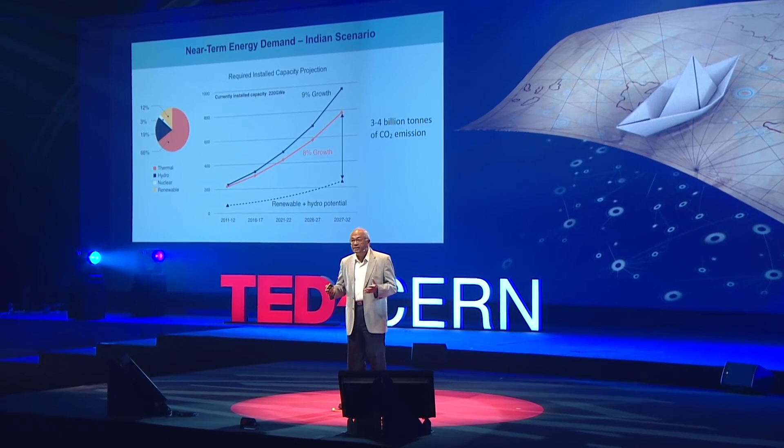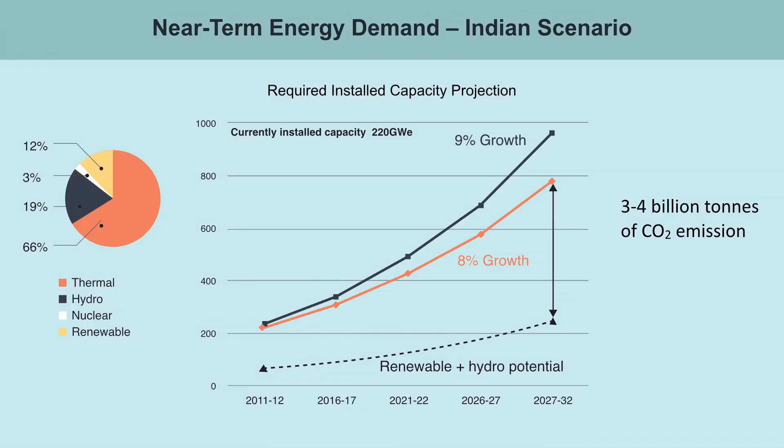So what is going to happen in the next 20 years? You know, in countries like India or China, there has been very large-scale economic growth. And all this economic growth can be sustained if you provide energy. So in the next 20 years, if this 8 to 9% economic growth, which has been continuously there in India for the last decade or more, continues, then you will see that we'll go from the present level of about 220 gigawatt installed capacity to something close to 800. So four-fold increase in energy.

And this would represent CO2 production of about 3 to 4 billion tons, over and above whatever is being done today. So that's the real challenge. So what is the solution? No doubt that the solution comes from the primary energy sources. It is solar, wind, and nuclear.

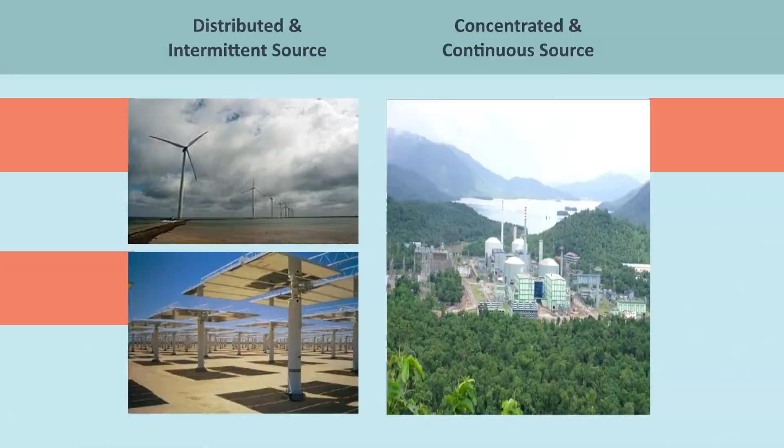But when we talk of these primary energy sources, they have to be classified into two classes. One is distributed and intermittent. The other, nuclear, which is very concentrated and continuous. It's very obvious to understand, because the sun doesn't shine all the day, neither does the wind blow. But nuclear has a very high capacity factor.

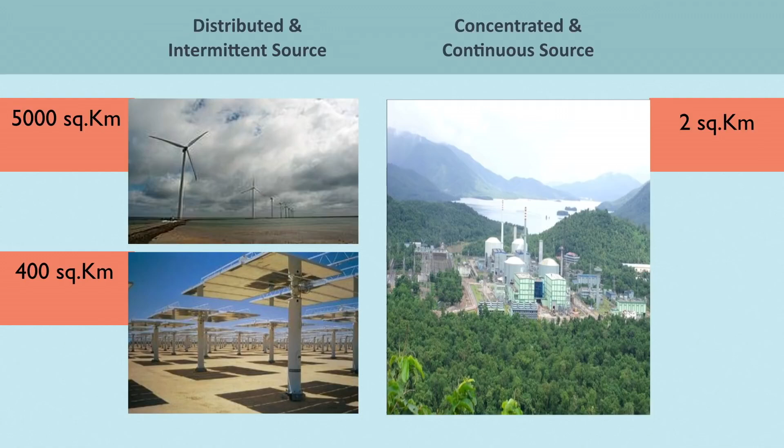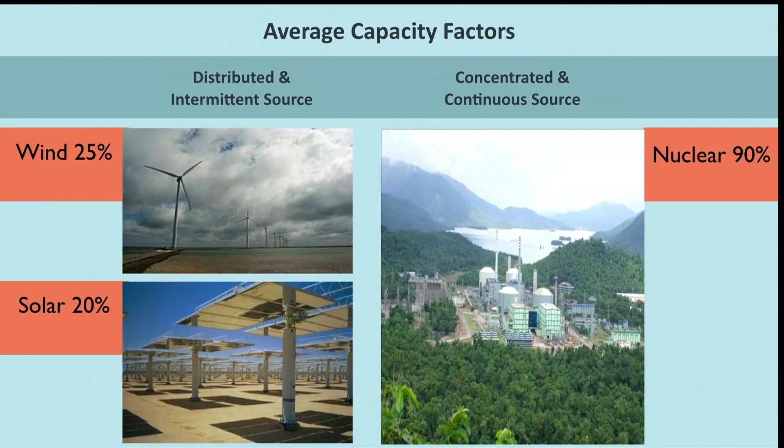And if you look at the kind of distribution, you require about 5,000 square kilometers of area to get a 10 gigawatt, 10,000 megawatt installation by wind. Solar about 400 square kilometers, whereas nuclear can do the job in about 2 square kilometers. Look at the average capacity factor. Capacity factor in wind and solar is about 20 to 25%, whereas in nuclear, it's a technology which has been proven, and it's over 90%.

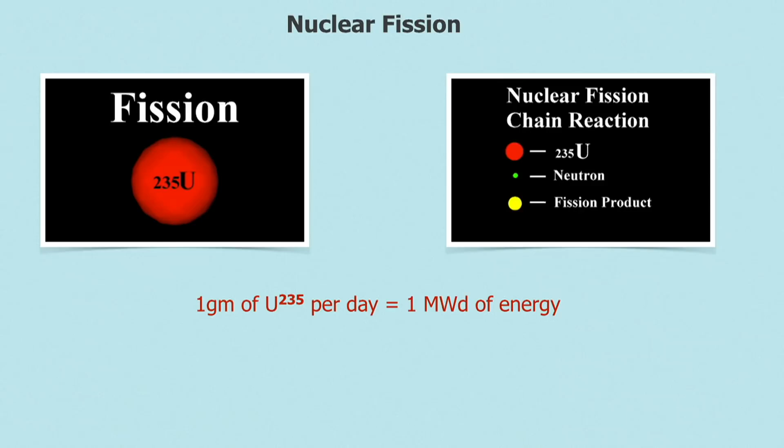The process of nuclear fission, I'm not telling anything new to this audience. You all know what nuclear fission is. You have a U-235 nucleus, a neutron comes, it becomes 236, an unstable nucleus, breaks up and provides energy and neutrons. Please also give emphasis to the neutrons that are created, because without them, it is not possible to establish a chain reaction. And one very important and simple fact to remember is that just 1 gram of uranium-235, if you burn it in a day, can support a 1 megawatt installation; 1 megawatt day of energy is produced.

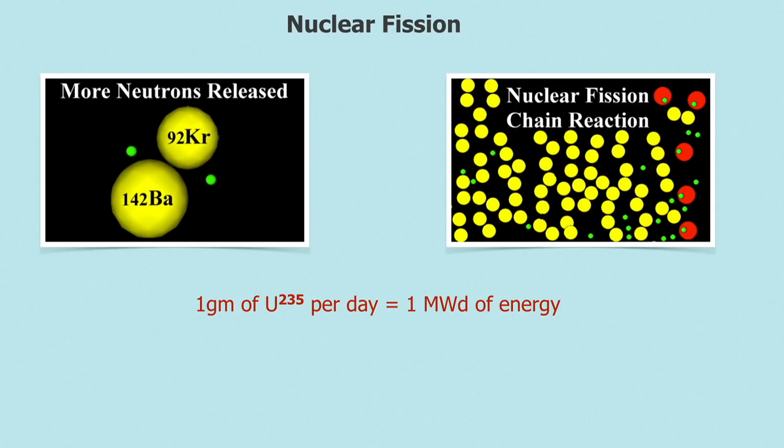And this is how the whole chain reaction proceeds. And everywhere you see that the most important point is the number of neutrons that are generated from every single fission process. The problem is that uranium-235, if you look at just that nuclide, which nature has given us, cannot really sustain nuclear energy for a long time. So the question remains: is it not possible to utilize the other part of natural uranium?

Natural uranium contains less than 1% of U-235, but the remaining 99% plus is uranium-238. And that gets converted into plutonium, which can be burnt again. Same way, the other element is thorium, which is 232. If it takes one neutron, then it goes over to uranium-233, yet another fissile isotope.

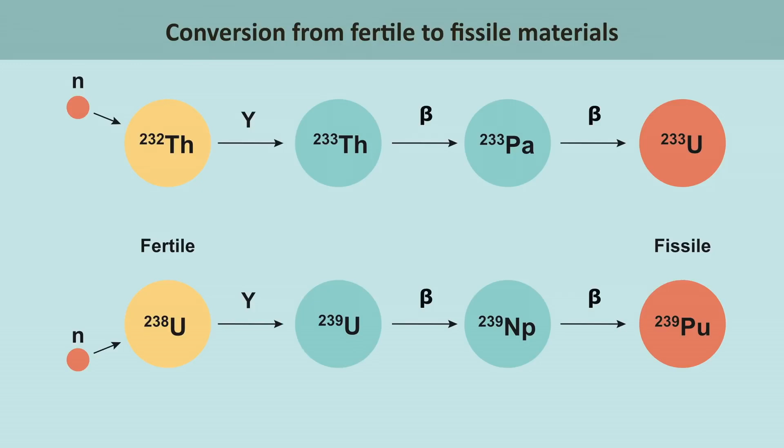So the moment we consider not only uranium-235, but also uranium-233 and plutonium-239 as our fissionable, burnable material, then you'll find that the energy stock that the world has is really sufficient for sustaining energy supply, not just a few centuries, but a few millennia.

So this was the hope of the first generation nuclear scientists who worked in several countries in the 50s. But now, because many other issues came up, the nuclear program has slowed down in several countries. But again, there's a revival of interest, particularly from the point of view of thorium utilization. Because thorium is very abundant, it's 4 times more abundant than uranium, and thorium is also very easily available, like the example that I'm showing here.

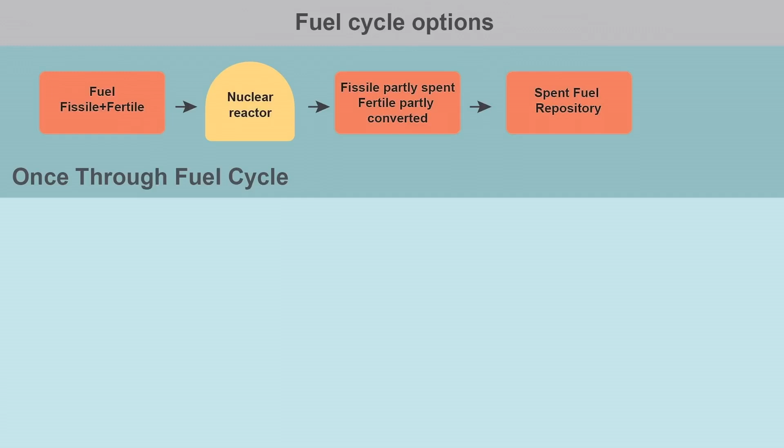It's available in the beach sand in Kerala, and there's a huge reserve of thorium in India, and in many other places like Scandinavian countries, and the stock of that is typically 4 times that of uranium in the world. But one has to accept the other important issue about the fuel cycle. If we use the spent fuel which comes out of the nuclear reactor as a waste, then we are not tapping its full energy potential. Only less than 1% of that energy potential has been used.

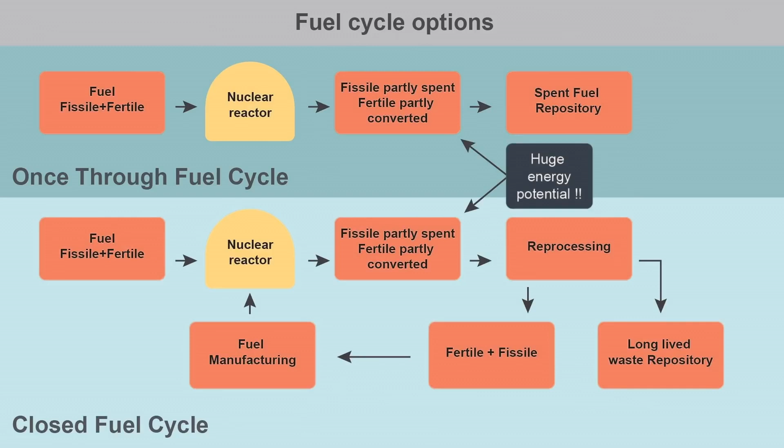But the moment we do a closed fuel cycle, where the spent fuel is reprocessed, and from there the fissile and fertile material is again used back in the nuclear reactor, then we can multiply the total energy usage. But more than that, it also handles yet another major issue, that is the nuclear waste. When you talk of nuclear waste, this is a real technological problem associated with nuclear energy, because you generate nuclear waste which has a very long radioactive life.

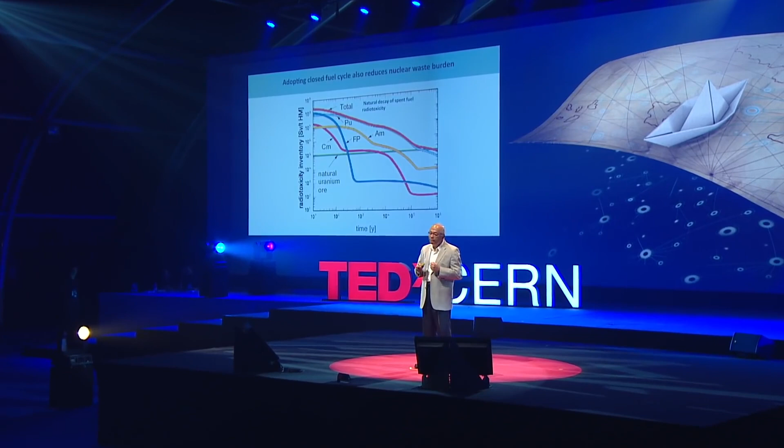Here we are plotting the radiotoxicity as a function of time, and you can see that the natural level of radiotoxicity of natural uranium is indicated by the green horizontal line; the total level comes down to the same level after about 200,000 years. It's a very long time. Human history is only 6,000 years. So who takes the responsibility? One generation takes the responsibility of generating that waste, which will live for 200,000 years?

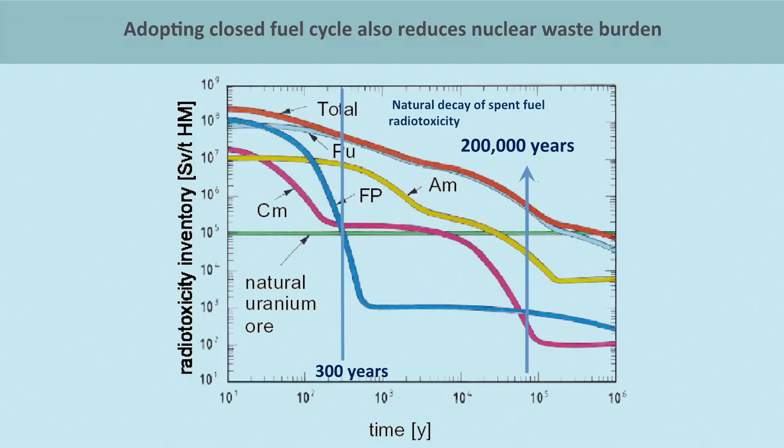Obviously not. The answer to that is, again, if we take out things like plutonium, americium, curium, and burn them out in another reactor. So the closed fuel cycle not only provides you more energy supply, but it also takes care of the waste.

Coming to thorium, recently, in literature, on the internet, everywhere you find there's a tremendous interest in thorium reactors. Why? Thorium can be used in different types of reactor. It can be in solid fuel reactors, molten salt reactors, and also in accelerator-driven subcritical systems. If you are talking of an established, robust technology, which has worked for decades, even now 14% of total electricity generation in the world is from nuclear. And you can see that it is possible to do in conventional reactors.

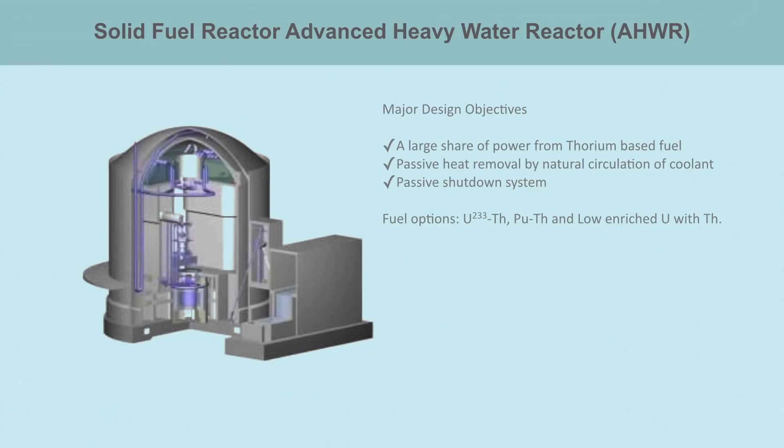Carlo Rubbia, who was the director of CERN, actually predicted many years back that you can, in fact, use thorium in conventional reactors. So India took the effort of designing, which has gone through many international reviews, and we know that it's possible to design a reactor which is very safe, because here everything is passive. That is, all safety mechanisms depend neither on human intervention nor on external power.

Because whenever we talk of nuclear power, you remember the incidents in Fukushima. So we have to think not only of the use of thorium, but also of natural circulation, by which, just through the thermosiphon process, you can take out the heat. And these kinds of reactors can burn uranium-233 plus thorium, plutonium plus thorium, and also low-enriched uranium and thorium. Look at that, it essentially can burn the spent fuel of the previous generation reactors.

Coming to the molten salt reactor, it's a very interesting concept. The whole reactor core, the fuel, everything is in molten condition.

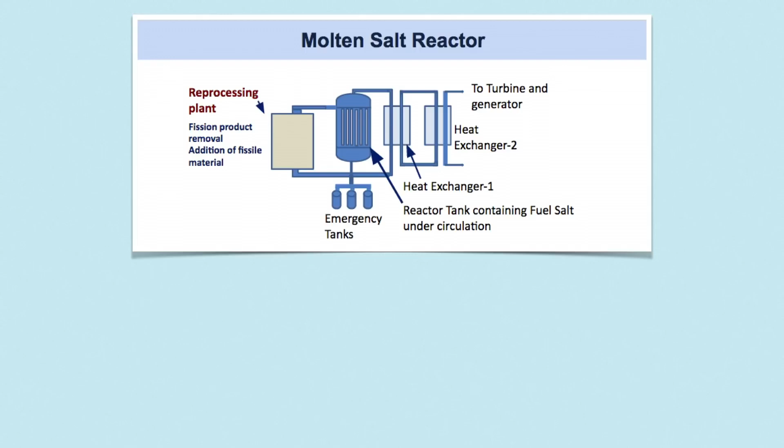We are all worried today of the meltdown accident, that inside the core of a nuclear reactor, things will melt down and will cause problems. But here, everything is already molten. So there's no chance of a meltdown type of process.

That fuel actually circulates through, and it goes through a reprocessing plant. So it takes out all those which are poison for the neutron, and it also puts in all that other fissionable material which are depleted. So it's something where, in terms of today's nuclear reactors, there's practically no generation of long-lived isotopes. So the waste problem is tackled.

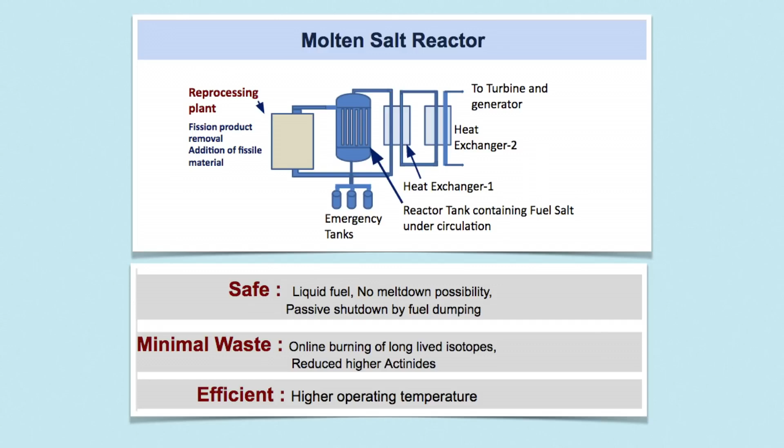It also has many other interesting features of safety. People say that you can even have a reactor of this type in your backyard. Why? Because these reactors can be made very small. Secondly, it's all passive. Even if there's any kind of departure from normal operation, it will come back quickly to the safe system. It is efficient because you are working at a temperature of about 650 degrees Celsius, much above the 300 degrees Celsius of the water-cooled reactors.

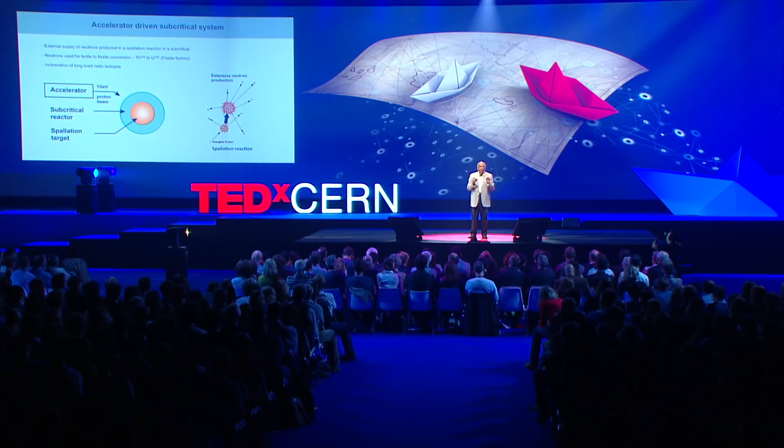The other idea is also extremely important. This is again something which has been toyed with in this center, CERN, as well as in many other centers in the world. It's not a technology which is developed, but the science part of it is fully established. As I mentioned earlier, what is most important in nuclear technology is keeping the balance of these neutrons. If you don't have excess neutrons, you just can't convert all that fertile resource that nature has given us, like thorium or uranium-238, into fissile.

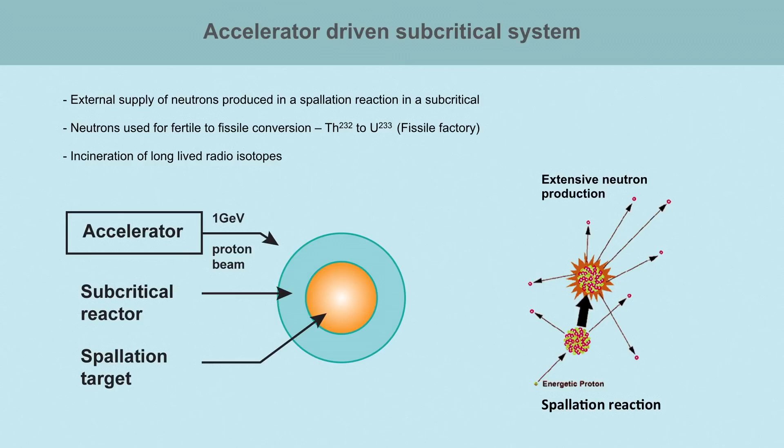Here what one does is bombarding by very high energy particles. A giga electron volt proton can strike a nucleus and make the nucleons inside the nucleus boil up. In that process, you see spallation, which means essentially boiling. Neutrons shoot out from the nucleus. Earlier I referred to only 2 neutrons coming out. In this case, you may get even 20 neutrons for a single spallation process. These neutrons can convert fertile to fissile, and can also couple with a nuclear reactor around it.

So the basic structure of an accelerator-driven system will be a core with target material of heavy metal, with incident protons of 1 giga electron volt coming from an accelerator. And see the inherent safety feature of that: if the accelerator is switched off, the whole reactor is switched off. This coupled system, an accelerator and a reactor, can indeed use thorium without any reprocessing. That's yet another big challenge, and it's possible.

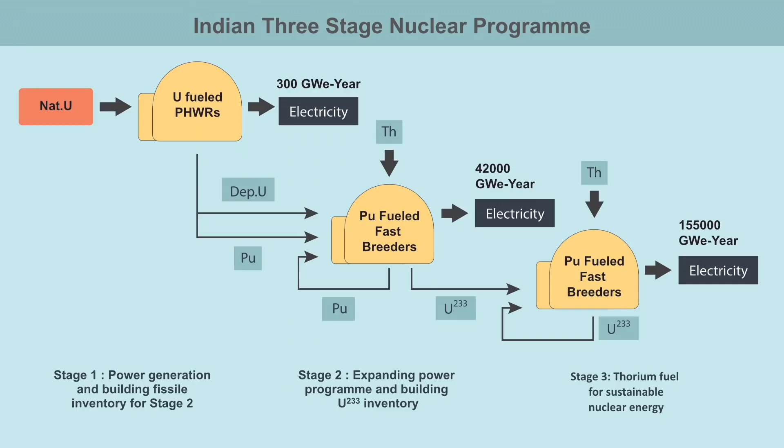We have a program which has been running for nearly 40 years now, and we start with natural uranium. Our present generation reactors are uranium fueled and produce energy. But we also produce plutonium, which is being pumped into our fast reactor. In the fast reactor, you get many more neutrons than in a thermal reactor, so it's possible to convert thorium to uranium-233. And that is our future, where thorium can be converted into uranium-233 and make nuclear energy a sustainable form of energy.

So stage 1 is power generation and building the fissile inventory for the second stage. Stage 2 is expanding the power program and making more U-233 inventory. And the third stage is burning this. Now, we are at the threshold of the second stage, because we have been running natural uranium-based reactors for some time, producing plutonium which is going into the fast reactor. The world's largest commercial fast reactor, 500 megawatt electric, will be operational in India next year.

And we have also been running a thorium uranium-233 reactor since 1996. It's interesting that all these 3 reactors are located in one place in India, very close to Chennai, called Kalpakkam, where we have a thermal reactor, a fast reactor, and a small experimental thorium U-233 reactor. So it's a great opportunity for me to invite you to visit India, go to Chennai, and see all these things in one place, which is not there anywhere in the world. With that, I thank you all.